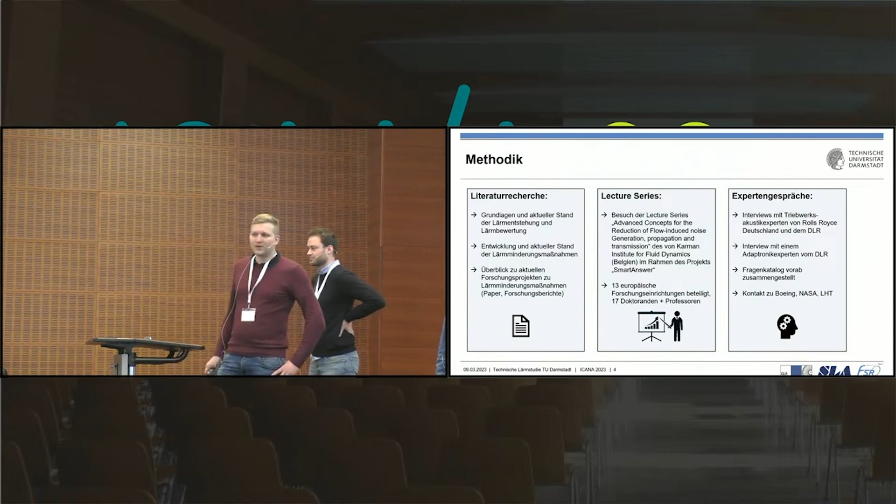The data, this is what we already mentioned, come from a broad literature research. We all come from the university. We know how to read a paper and how to analyze it. So this is where most of the data come from. And in order to assess all these comprehensive documents, we got in touch with industry, Rolls-Royce, Lufthansa Technik, Boeing, and we also got in touch with the universities and institutes who wrote these reports, like NASA or DLR.

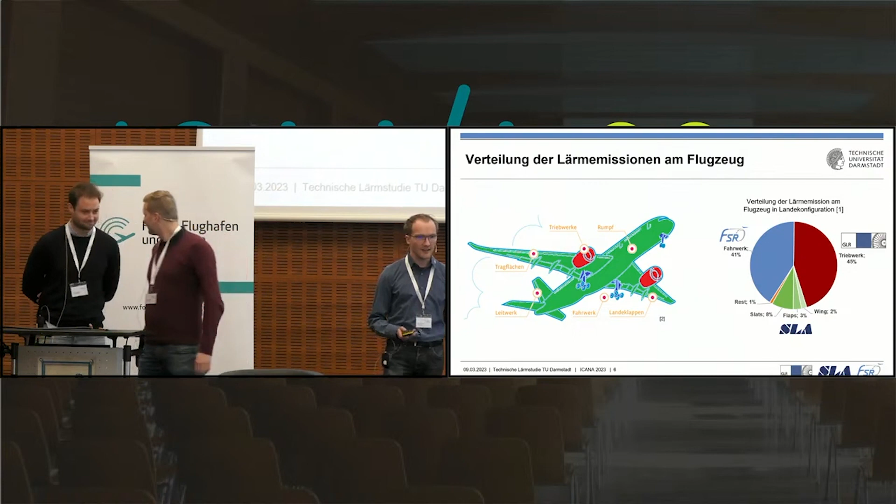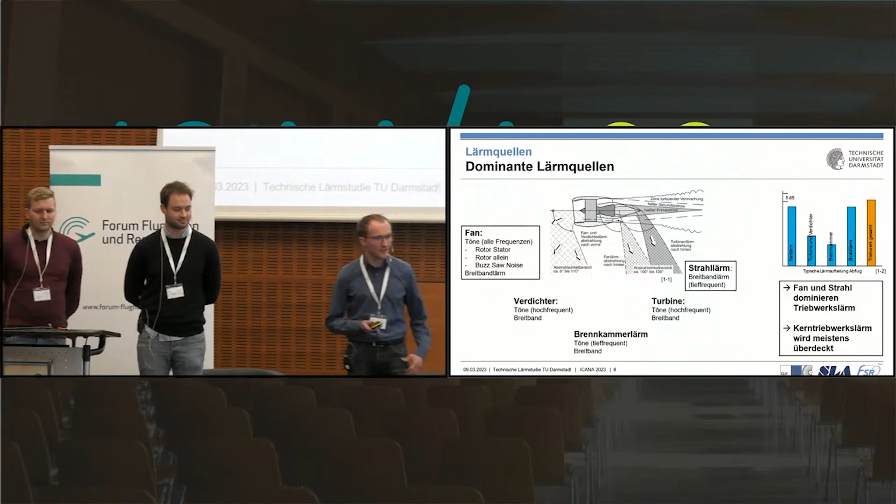Let me start with the engine. Before I come to the measures in noise abatement, I would like to talk about the noise sources. What is dominant here? You can see, for example, on that slide, a fan and a compressor. This is usual for each and every plane we know. And if you take a closer look, you will see the fan once again, then the compressor, which comes next. Then we have the chamber and then the turbine. And behind the turbine, you have then the jet.

Looking at the engine, you will see that noise is being caused everywhere. You have the rotors, you have the fan, the compressor. This is where you will get tonal noise, caused by the interaction coming from the cold secondary flow, the hot primary flow, and when it comes to the jet, you will get a broadband noise. This differentiation is very important because tonal noise is heard at a different frequency, and broadband noise has another frequency. If you take a look at the top right-hand corner on that slide, you can see where most of the noise comes from.

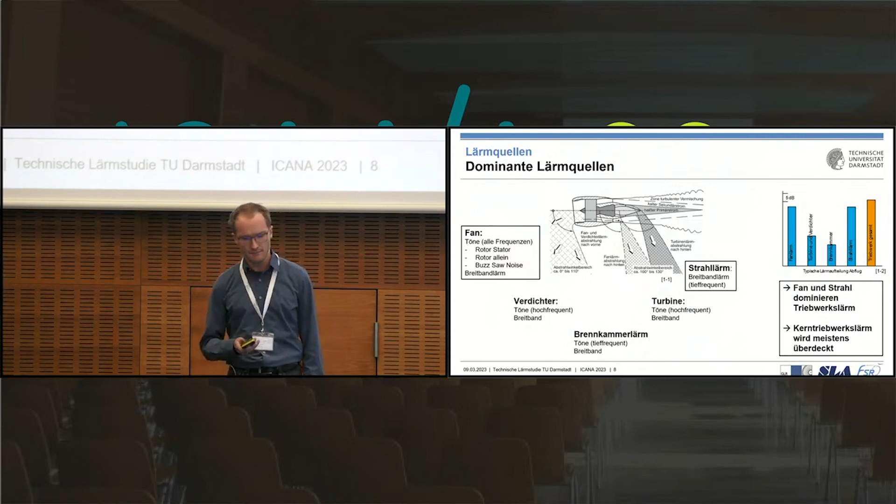You will see that the engine noise is dominated by the fan and the jet noise. The combustion noise, for example, and the turbine noise are a little bit lower than the fan and jet noise as such. So this is where you can see most of the effects if you do something against the fan or the jet noise.

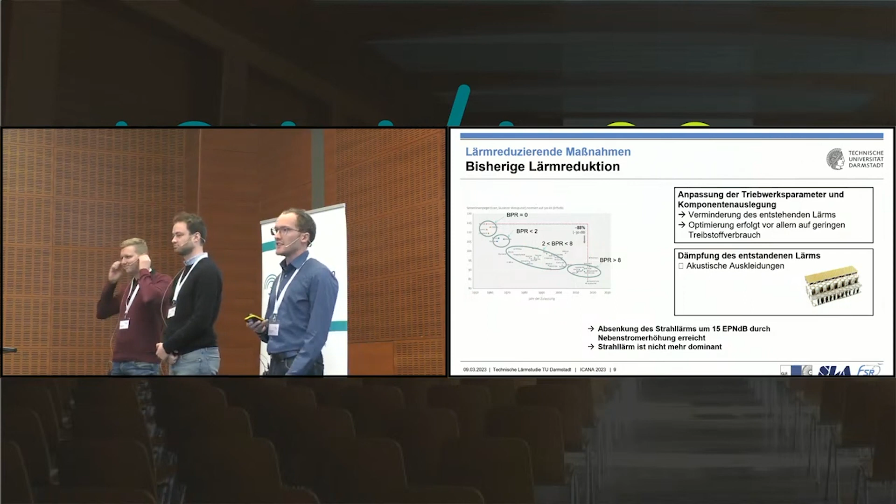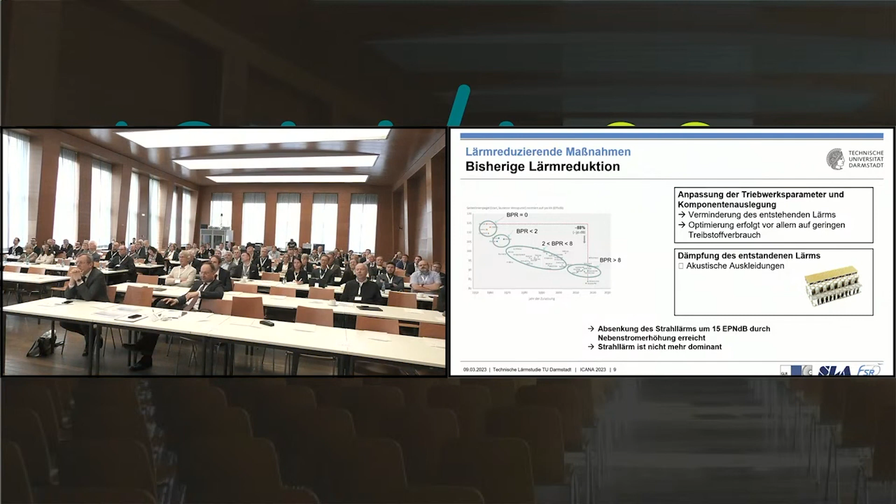What has been done so far, noise reduction to date, since we had, for example, jet engines in civil aviation? They started in the 1960s. The first jet engines were 30 decibels louder. So it is a lot of noise, and the noise was reduced between the former jet engines and the ones we're using today. There are two reasons, two blocks.

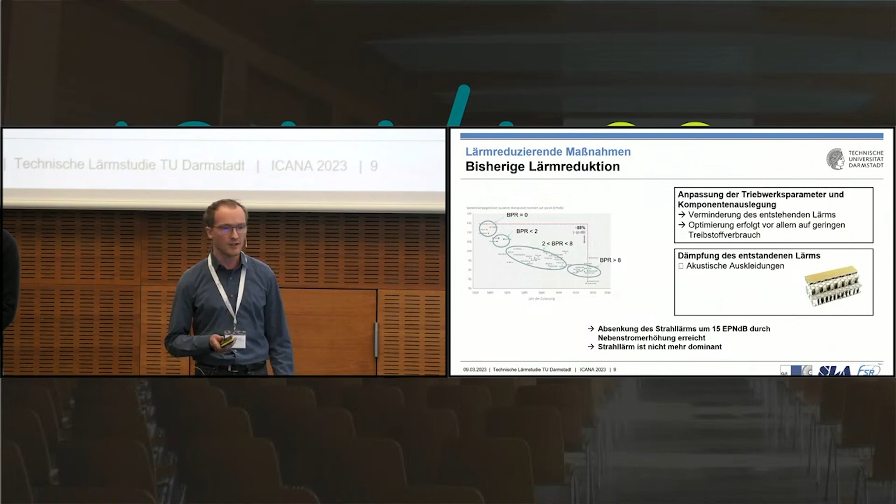Engines have been further developed since the 60s. We have a reduction of noise generated, and to be fair, this kind of further development was also made in order to lower fuel consumption. However, this also went hand in hand with the noise which was generated. If you use less fuel, you will have less noise produced. Then we can see that we have an attenuation of the generated noise by, for example, acoustic linings. This is how we're dampening the generated noise as well.

Let me carry on with a very important factor for reducing noise: increasing the bypass ratio. On the left-hand side, you can see a single jet engine, and it works like that. You have a little amount of air flowing into the jet engine, then it's being densened, it is being burned in the engine, and this kind of speed is being increased to a higher speed. Higher speed means more noise, and this is in the amount of the factor 8 — it is multiplied by 8. So if you increase the bypass ratio, then you will have less noise.

What was done, and this brings us to the picture on the bottom left, a different kind of bypass engine was used. You're not using the core engine, but most of the air is bypassing the engine. This is how you have much more airflow in order to have exactly the same thrust. You have lower speeds in the jet stream, and this is leading to a massive noise reduction.

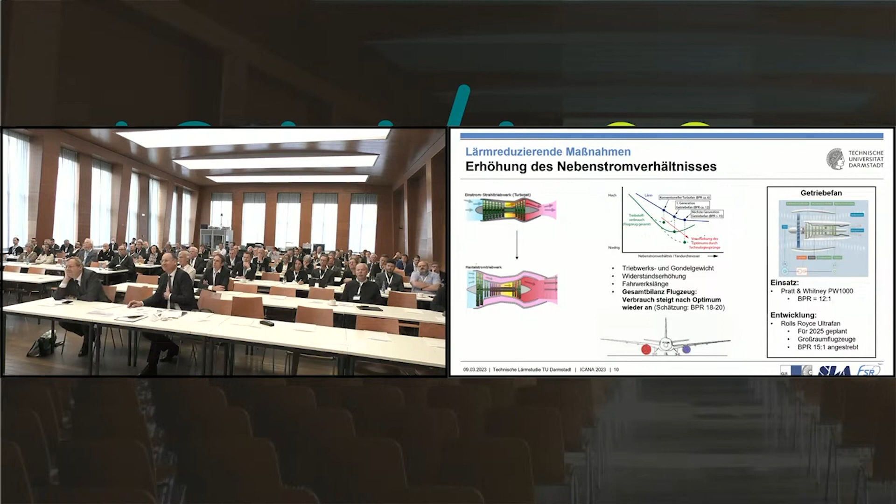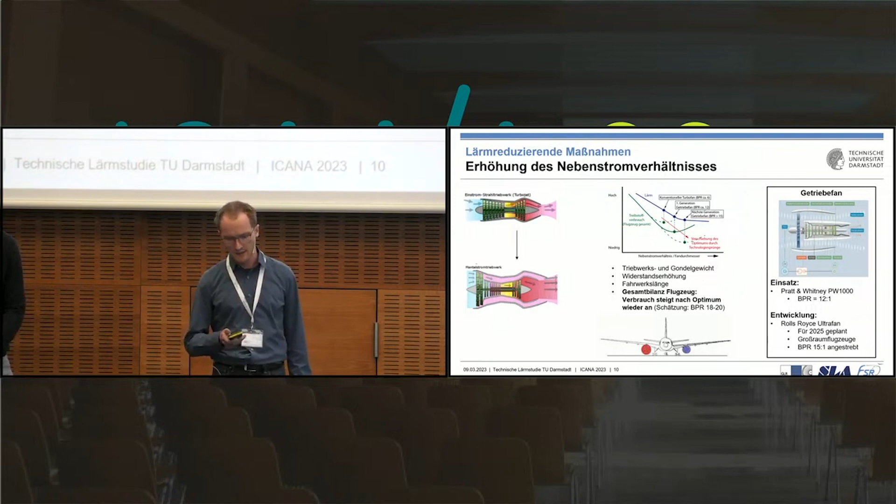However, the noise from the engine was reduced dramatically by that increase of the bypass ratio, so the fan noise and the engine noise are comparable now.

The jet noise is caused by a mix of a high-speed jet and the environment, the air. We have smaller and bigger turbulences. If we have smaller turbulences, it is a high-frequency noise, and if we have larger turbulences, it is a low-frequency noise. You might know it, like a bass at a concert is always very loud, and the higher frequencies are never as loud as the bass.

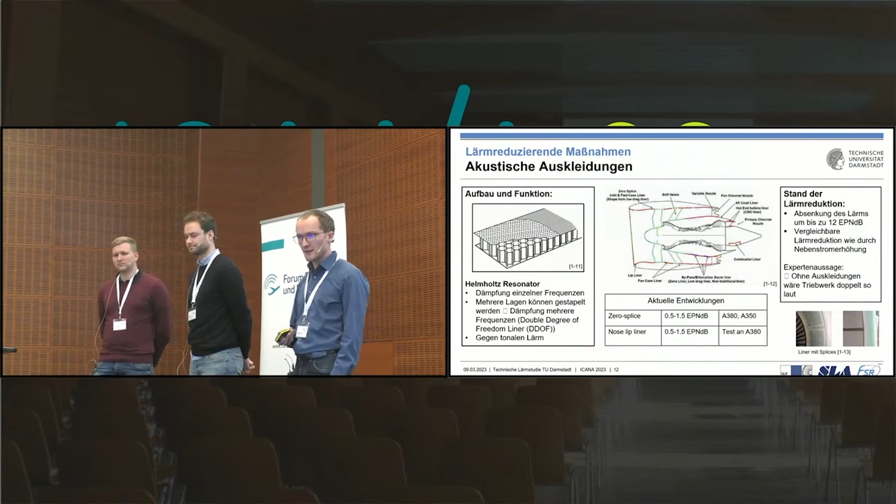You can see it in the center. Everything which is highlighted in red is being lined with these kinds of acoustic linings, so it is being used to dramatically reduce the tonal fan noise.

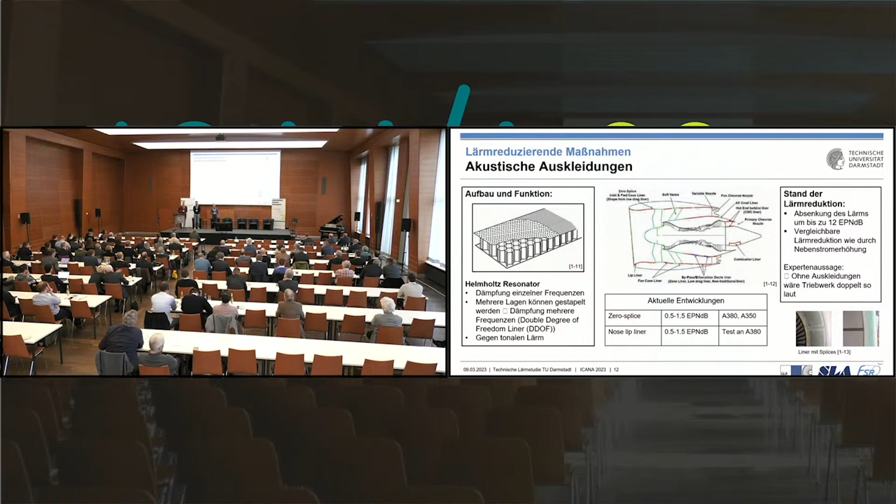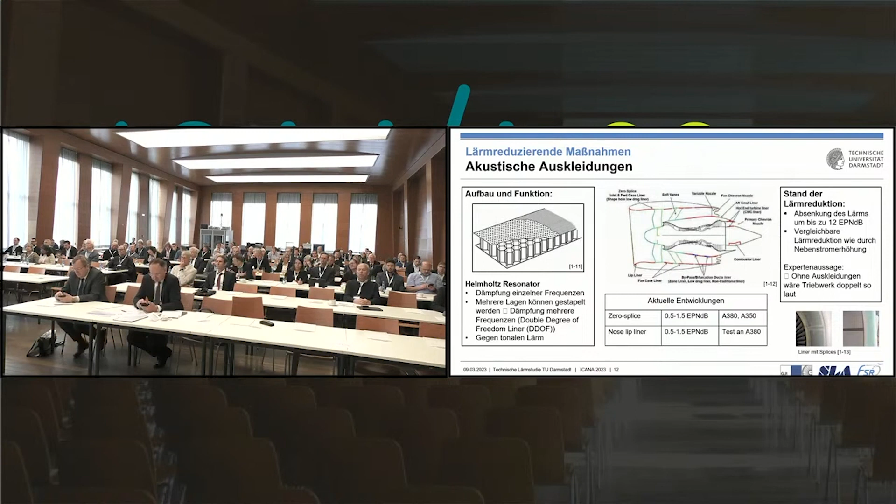And the state of the art in noise reduction is, for example, a reduction of noise by up to 12 EPNdB. Without the acoustic linings, the fans would be much, much louder, twice as loud to be precise.

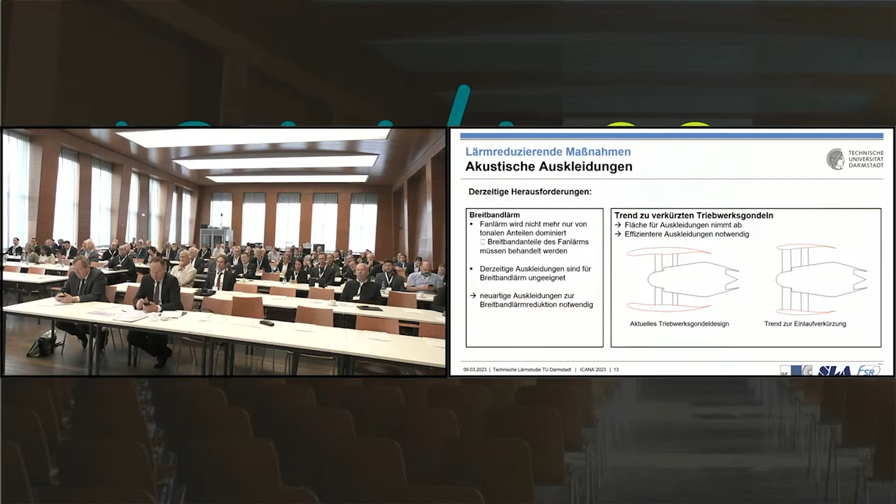However, these acoustic linings can only be used to mitigate tonal sound, nothing when it comes to broadband noise. In some situations, the acoustic linings helped very much against tonal noise, but the broadband noise which exists in fans is not being treated.

In order to make sure that further noise reduction can be reached, acoustic linings are needed to reduce broadband noise as well. You can see it on the right-hand side, as I mentioned at the beginning.

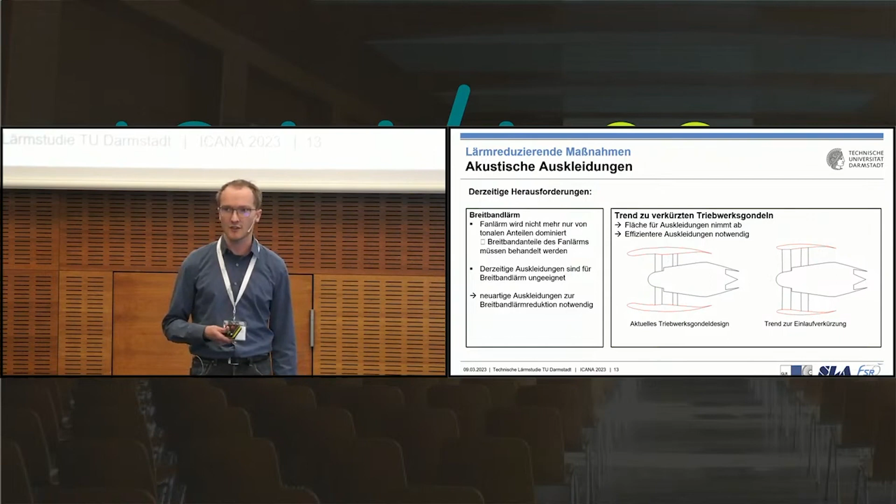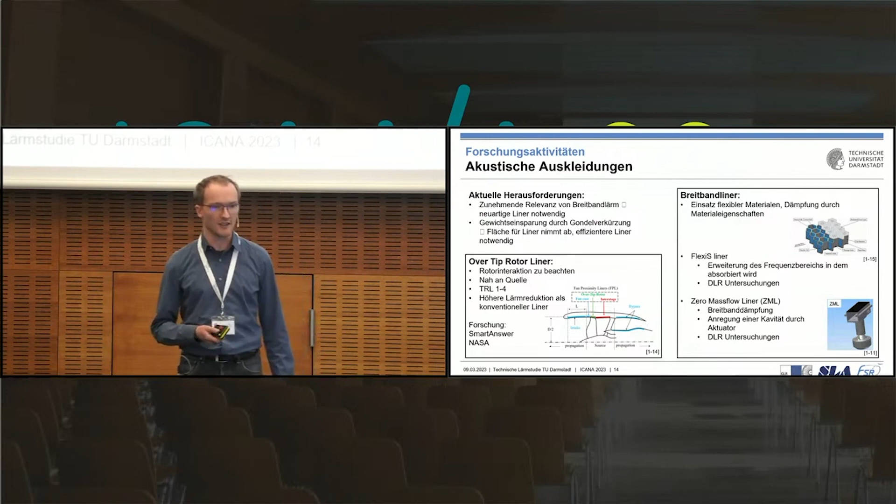So using linings there is something which still needs to be further examined, and research is being done in this area. On the right-hand side, you can see other options like the broadband liner, for example. Flexible materials are being used to dampen through material properties, flexible materials which can reduce the noise. Or actuators are being used, for example, to extend the frequency range. Further measures to reduce fan noise are active measures.

The principle is similar to what you might know from noise-cancelling headsets, which means you are reducing sound by countersound. If you think of noise-cancelling headsets, you're using, for example, error microphones and loudspeakers, creating some countersound.

But we have learned that there is not much benefit compared to acoustic lining, which means the noise reduction is not that dramatic. If we want to see a higher effect, DLR tries to use compressed air injection between rotor and stator. Other measures being analyzed and researched right now include treating the blade leading edges using wavy or jagged edges.

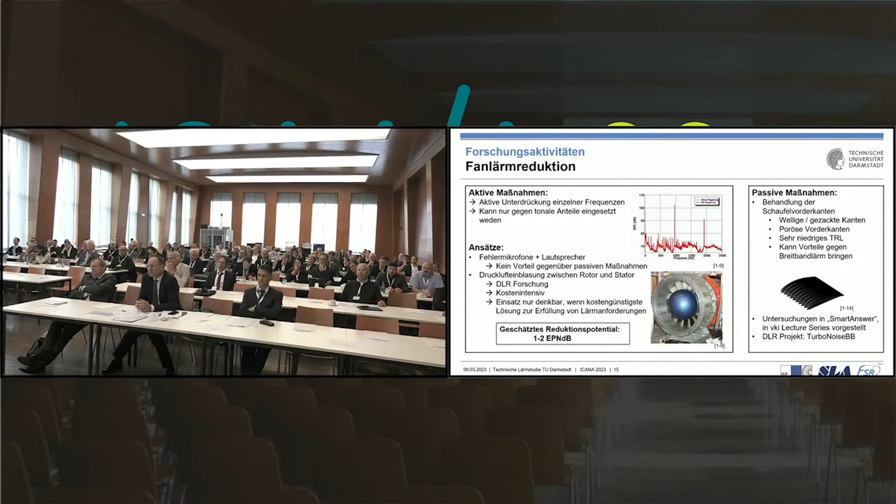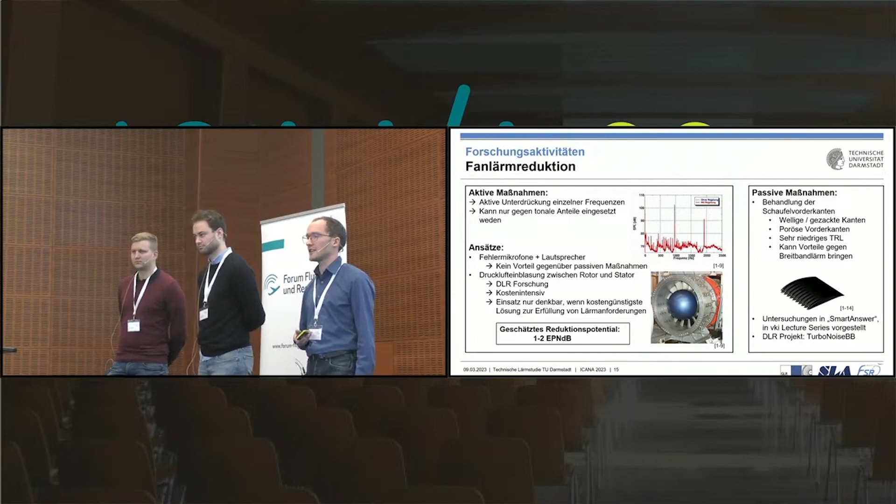But this is not very advanced at the moment, as there are other challenges to face regarding stiffness and aerodynamics. So it's a massive change to amend the blade leading edges to make them wavy or porous. It will still be in the focus of research, and it will take some time until we can see finished products offered to the market.

This brings me to the end of my part on engine noise. I tried to present some noise cancelling or noise reduction possibilities: adjusting engine parameters, increasing the bypass ratio, acoustic lining to dampen the sound. And there is a lot of research being done on active countersound measures.

Finally, I would like to make a brief forecast of further engine noise measures. We expect only small improvements in the near future. How come? Well, we've already reached a lot by reducing jet noise, and now people know that jet noise and fan noise are comparable.

Okay, I will continue with the landing gear. As mentioned at the beginning, especially in the approach, the landing gear has a very dominant significance, just as the engine. Before I talk about the measures, I would like to start with an interesting fact.

If you go down a bit, the lower picture is by NASA. With overflight measurements, they have found that the nose landing gear under the cockpit, although it's much smaller and slender, produces more noise than the larger main landing gear.

And there's a proportional correlation: noise is proportional to the flow speed with a potency V to a factor of 6 to 8, depending on the source. So you can reduce noise by reducing flow speed. That's a fact we need to consider again and again.

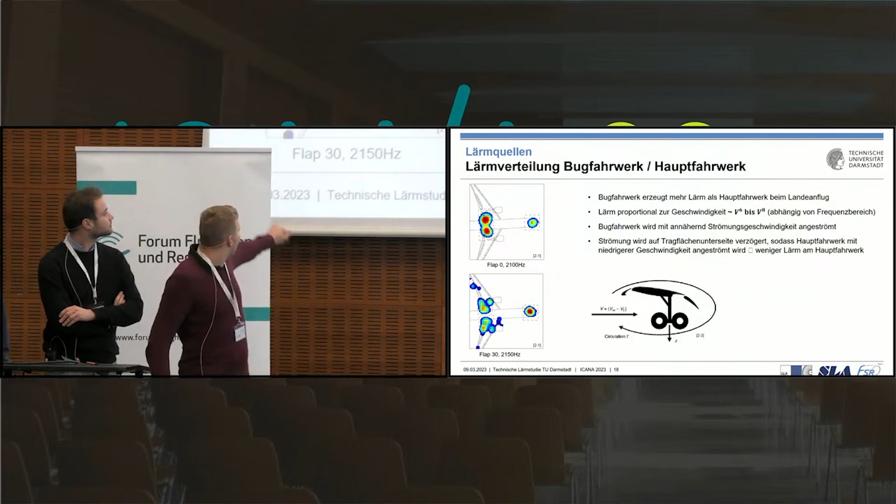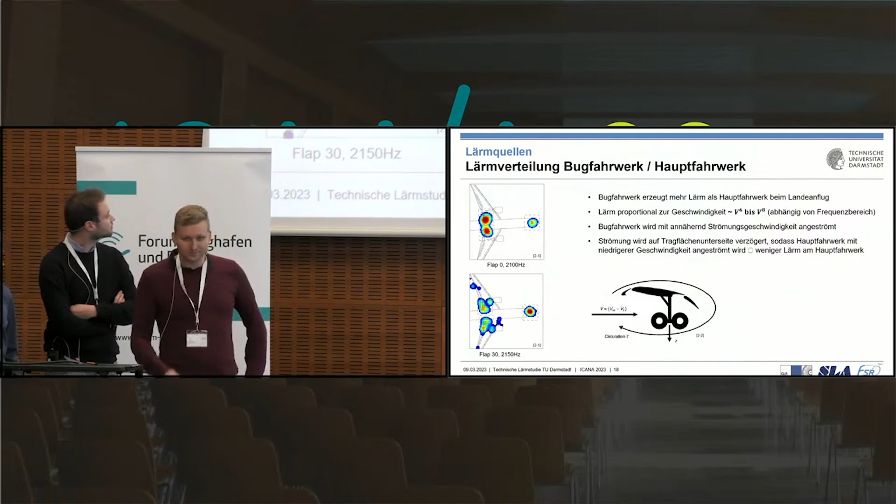With the main landing gear under the wings, the wings create uplift, and the flow at the lower side is slowed down, and this slowing down is enough so that the main landing gear is not the dominant source of noise. So you see how it looks like.

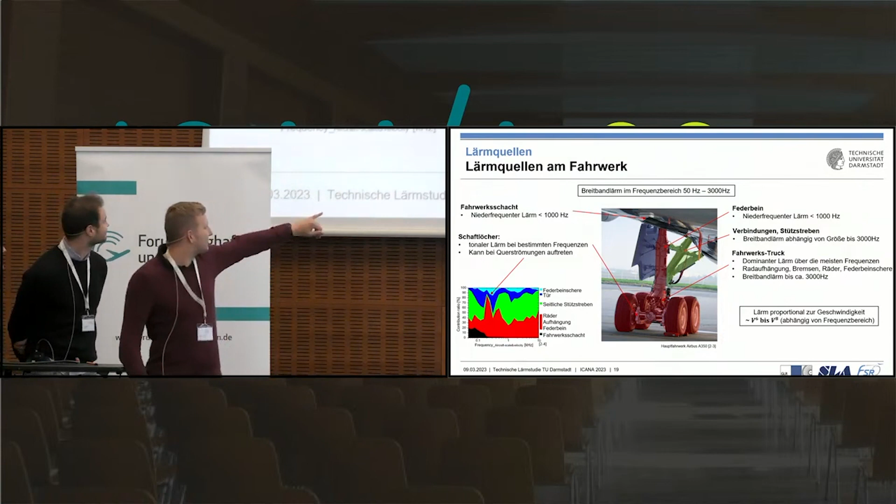I brought one with me. It's relatively complex — some larger ones like the strut, the braking system, the tires, the wheels. I think you see it quite nicely: a lot of small cables, hydraulic lines for the brakes.

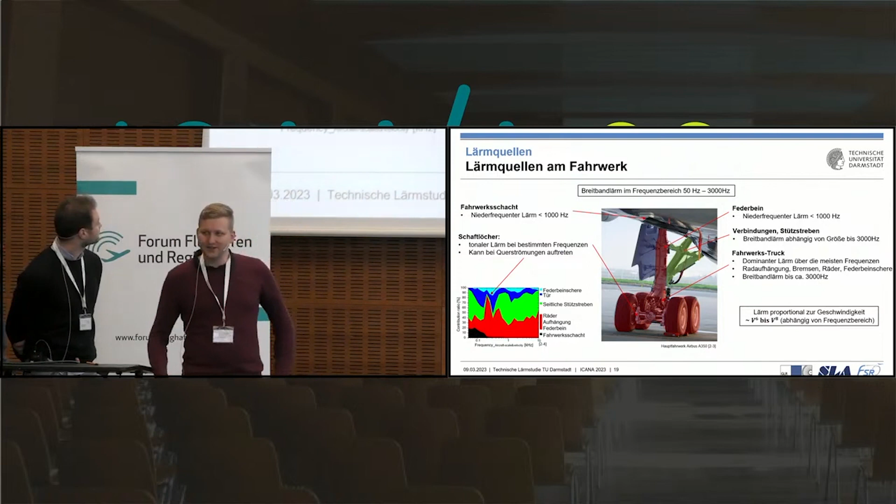And all together that leads to a broadband noise of 50 to 3000 hertz. That's more or less when the human ear is most sensitive. But I'll come back to that.

Now, how is noise generated? We have a flow situation from the left. It flows around a component, and behind that there is a turbulence wake, and this is what we perceive as noise — pressure fluctuation. In general, large components produce big turbulences and low frequencies, smaller ones produce smaller vortexes and higher frequencies, and this is how we have the different frequencies.

And what we also have — maybe in the upper area you don't see it that well — that's the shaft. That produces its own characteristics of noise.

And what possibilities do we have, especially with the components you see here? With the landing gear, you can only optimize them by lining them, by cladding them. You have fixed and porous claddings or linings, and with the fixed claddings, the objective is to shield critical components — the flow goes around, is deflected around.

There's a big disadvantage: if you deflect flow, you accelerate it — always. And as I said, noise is proportional to speed. When the deflection hits another component with a higher speed, it might happen that a cladding generates noise at a different place, and partially even louder.

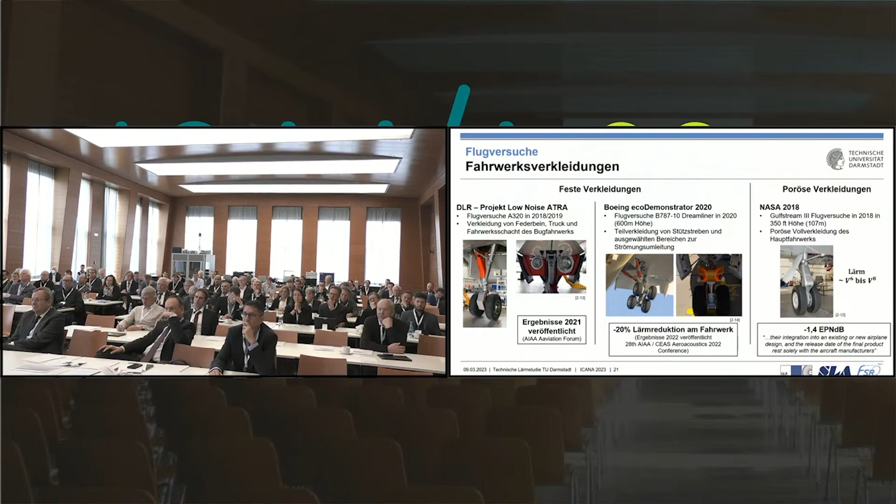On the right-hand side, that's a NASA experiment from 2018, and that was minus 1.4 EPNdB. You have to put that in relative terms - it was a research project, so the landing gear could not be retracted. If you design it for real aircraft traffic, you have to change it. But definitely you can reduce more noise than with the fixed claddings.

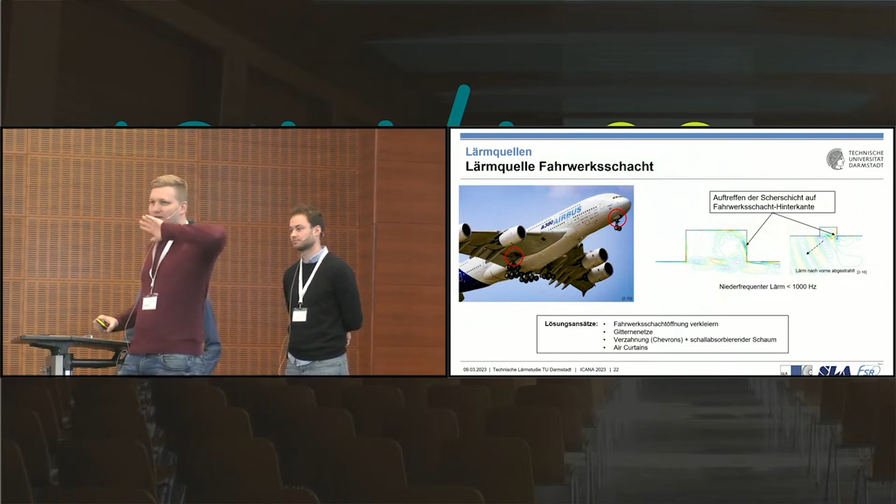The second part of the landing gear producing noise is the landing gear shaft. You see it here, less than 1000 hertz - those are the lower frequencies that you can perceive over long distances. The flow comes from the left and penetrates the shaft. The shaft acts like a resonance body, like a bass box, and radiates to the front, so that's noise you perceive already before the aircraft has passed by.

For that there are different approaches. The most logical is the video you see here: the real shaft during start and landing is not fully opened, but there's a flap mechanism, so while starting and landing a big part of this surface is covered. There are aerodynamic reasons for that, but there are also positive effects when it comes to noise. Disadvantage: mechanically, there's always a little gap open.

This is a simple retrofitting measure with 0.5 EPNdB noise reduction potential. Just to remember, the claddings on the left-hand side were also 0.5 EPNdB, and they were much more difficult to design. Maybe that's a measure you can really do and consider as retrofitting.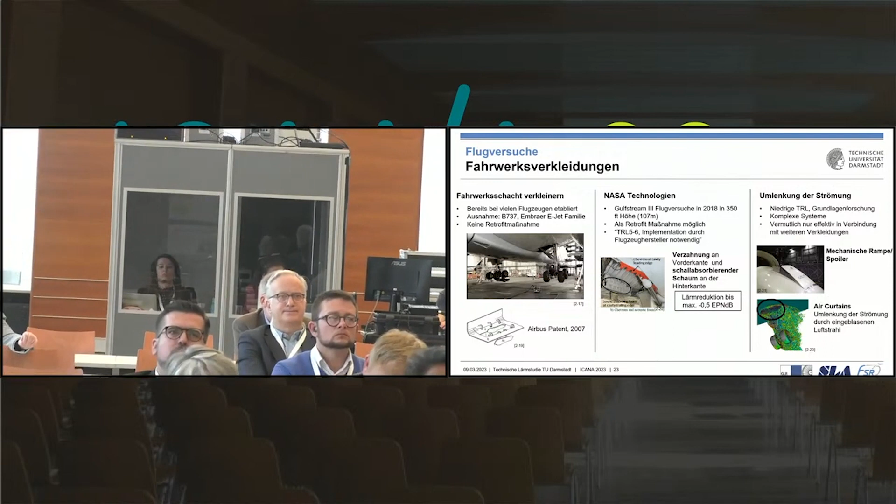On the right-hand side, you can see a look into the future. There are possibilities or theories that the flow could be deflected around the shaft with a mechanical spoiler like in the top picture, or, that's interesting, with a 90 degree turned airflow that deflects the flow. These are technologies that haven't matured a lot, so they need to be researched more, and in the next 20 years maybe they won't be available.

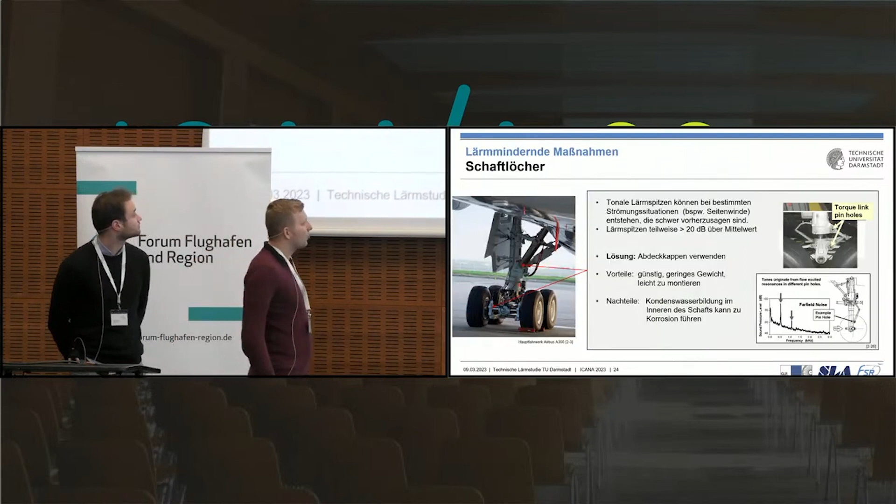So the video once again. There's another problem with landing gears, and I think DLR has known that for 20, 30 years - they've always considered that. These are the so-called shaft holes. Everywhere at the landing gear there are little cavities, and especially with lateral winds, if there's lateral flow, there might be tonal frequency peaks.

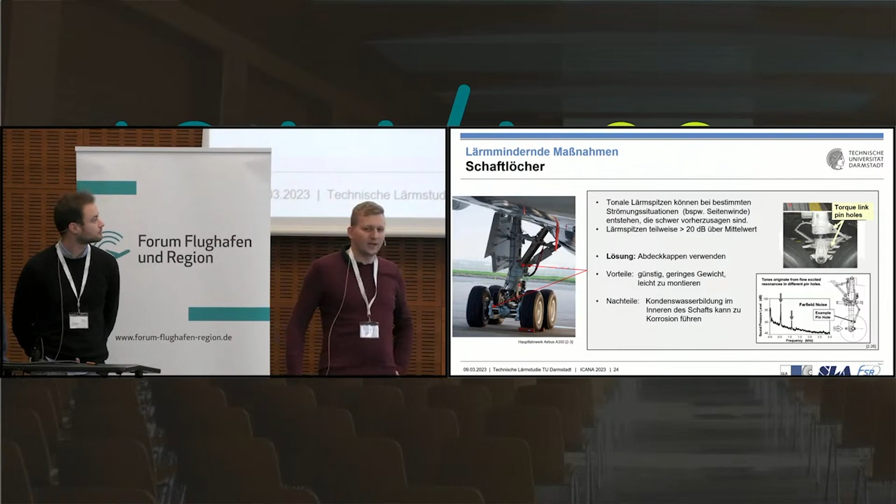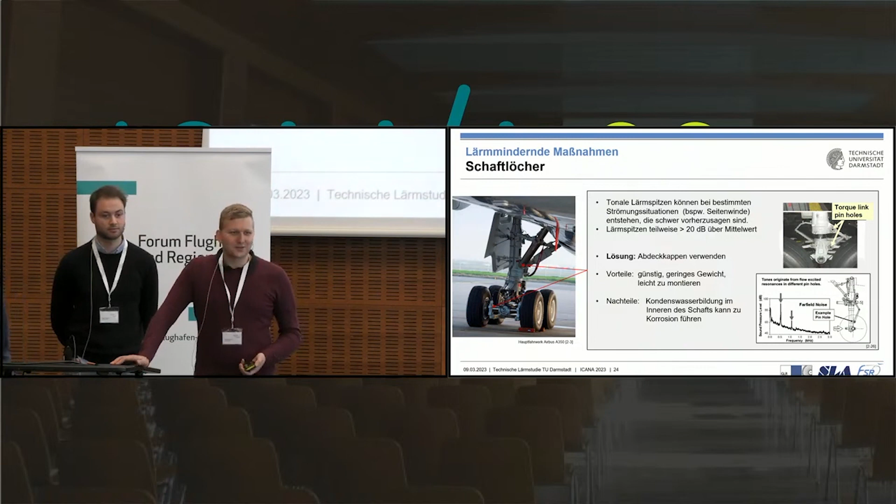Maybe you can see that here - these are the whistling sounds that you hear. You can eliminate them easily by just having a plastic cap on it, or one made of a different material. We talked to experts and they said it's a great solution, can be easily done. But other experts said it's a very bad idea - condensation water might accumulate during starting and landing, which might lead to corrosion, and you don't really want the landing gear breaking off during start or landing.

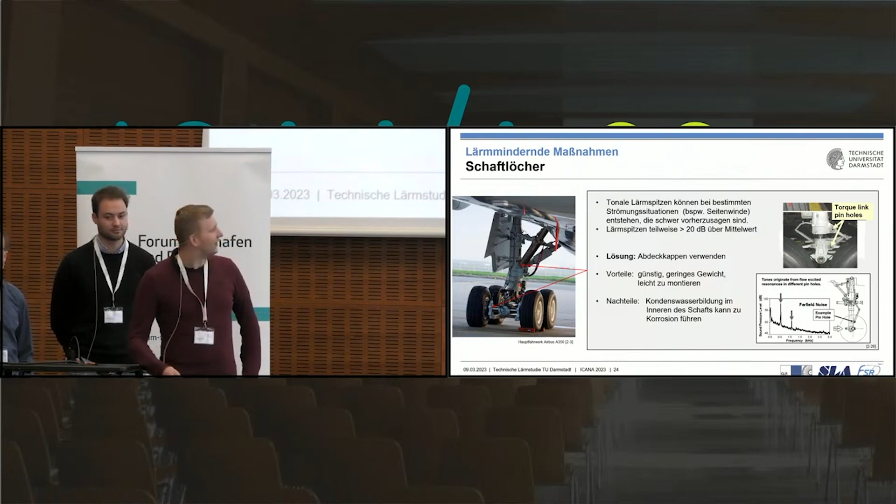So a very difficult discussion, especially with engine manufacturers. You could mention that as a design hint, so that shaft holes, maybe when designing the aircraft, should be considering that point. That was it already when it comes to the engine and the landing gear.

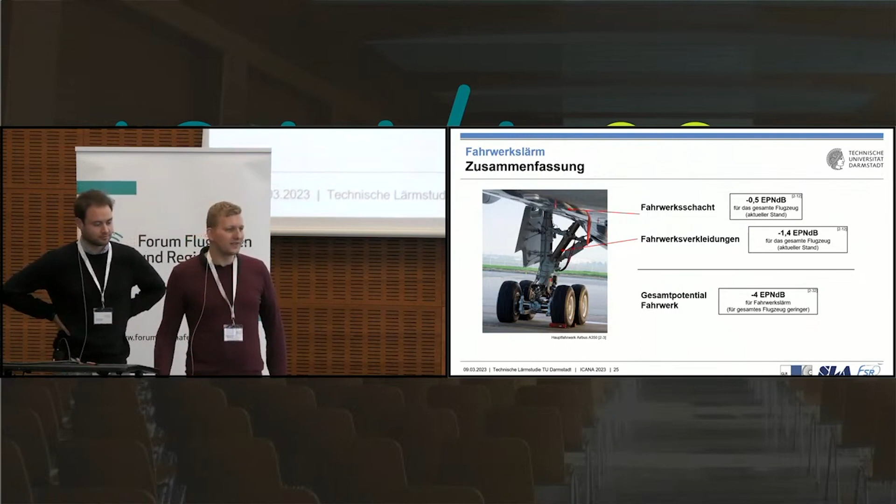Noise reduction of 1.4 EPN dB with claddings could be achieved, and 0.5 with the shaft optimization, and that's a total potential according to DLR for the landing gear. 4 EPN dB noise reduction is possible, only related to the landing gear. You have to calculate that together with the other components. The final value will be available at the end of that study, so we have to do some more work.

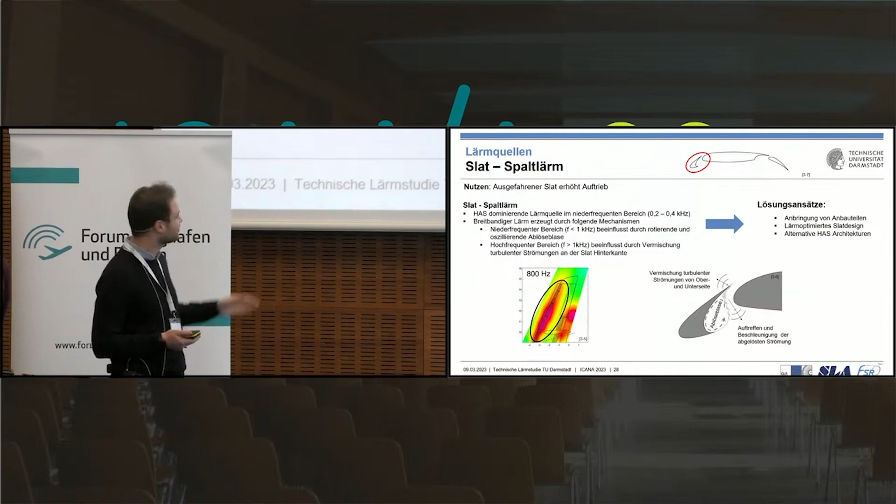Let me start with the slat slit noise. You can see it's dominating the low frequency range, and if you take a look at the left-hand side, you can see the heat map, and you can see where the noise is being generated. At the front side of the wing, here we have 800 Hertz, and the mechanisms which come into play here and which will lead to noise can be found on the right-hand side.

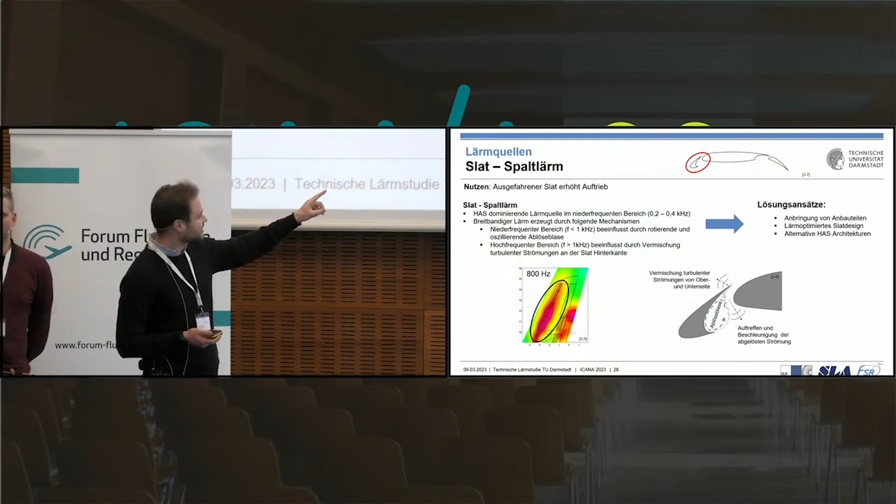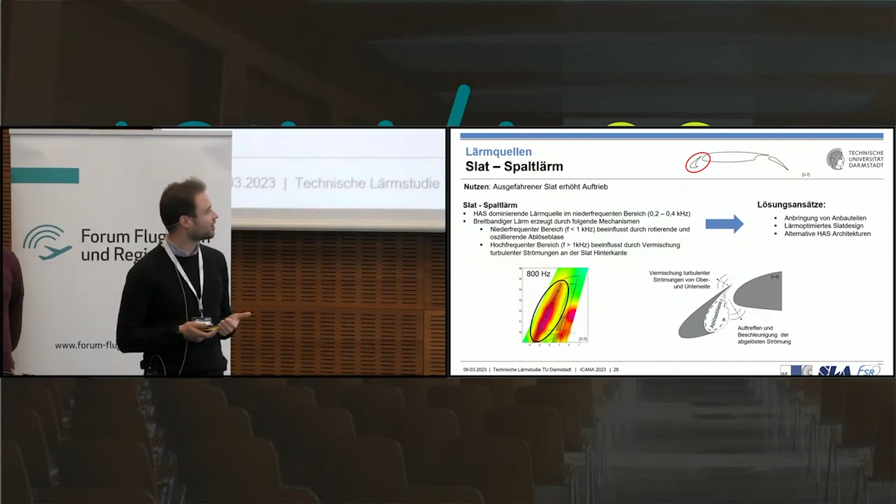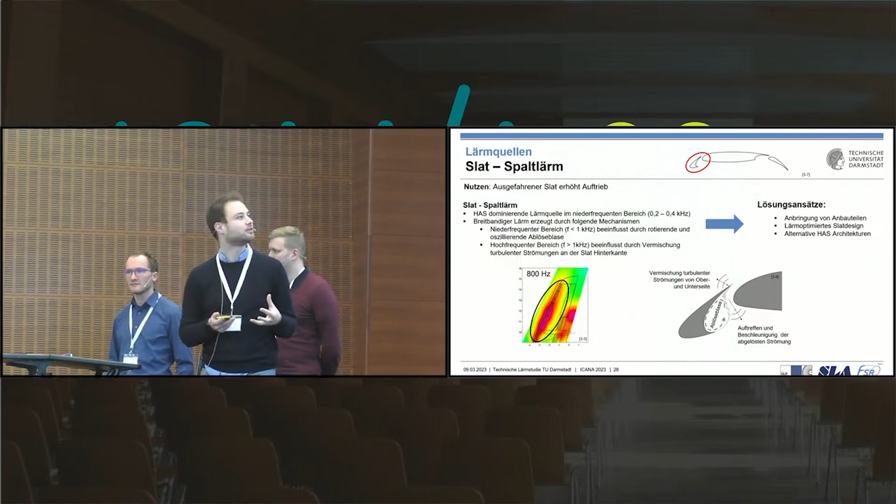At the end of this slat, you have this detachment bubble, which is oscillating. Secondly, you have at the upper edge the mixing of two airflows, and they're being deflected. If you want to reduce that, these two phenomena need to be influenced, and this can be done with the support of three concepts. You are adding, for example, attachment parts, as my colleagues have already presented. Then you have to optimize the slat design, and you have to find an alternative HAS architecture.

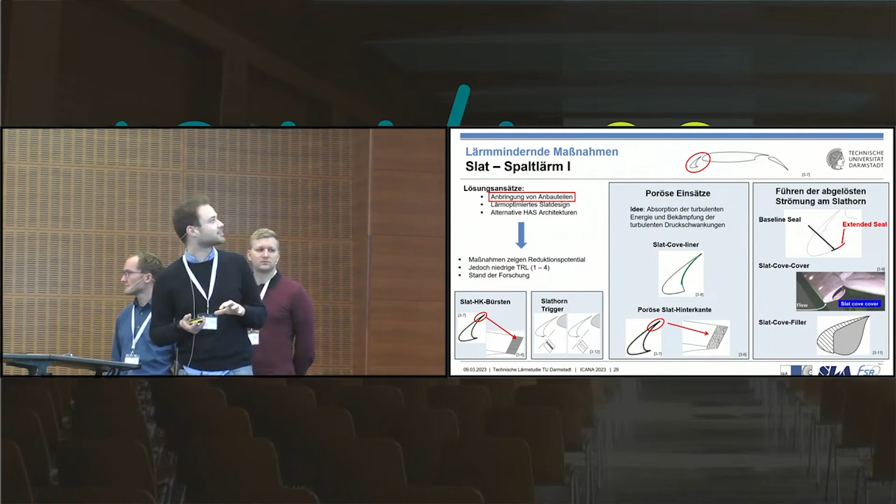So let's talk about the possible attachments. They have some reduction potential, however that potential is not very high, and the technologies are not very mature. Starting on the left, for example, you can add some brushes at the edge of the slats to increase the mix of the airflow, or you're adding some slat horn triggers which are then changing, for example, the oscillating blister. However, it might also lead to higher noise. It's very ambivalent, and it is still being researched.

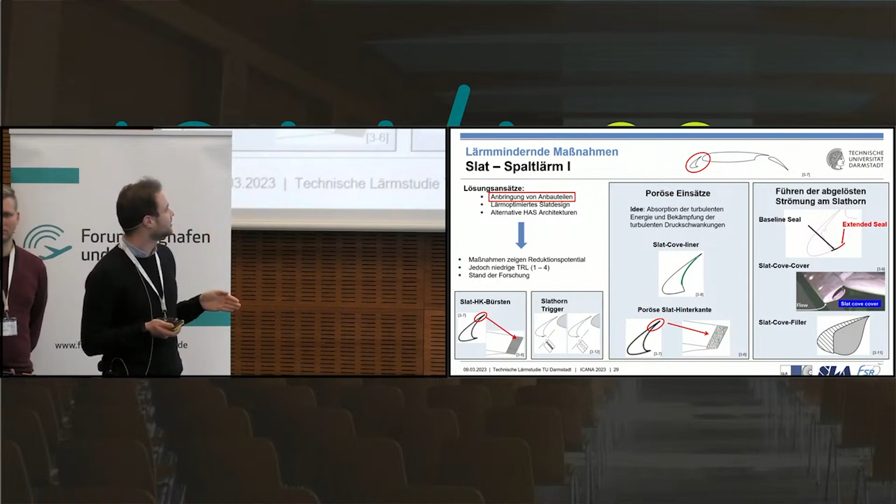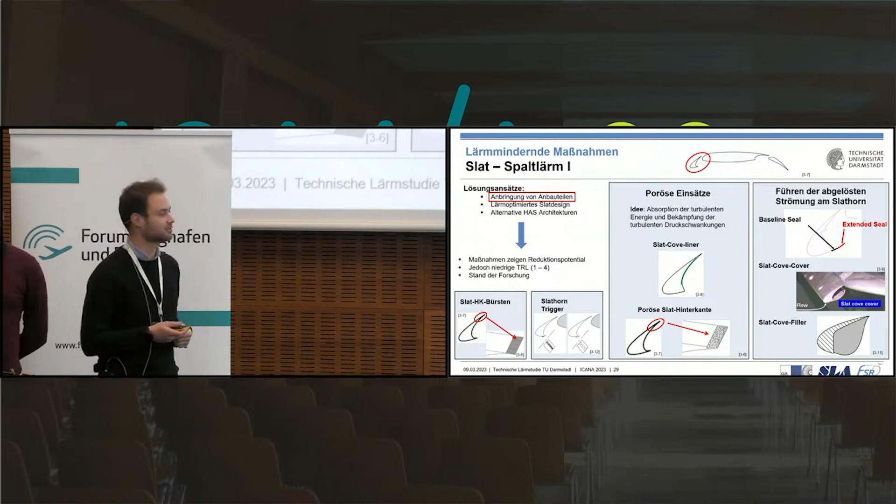Then porous inserts are also possible. Their impact on noise is comparable to the landing gears. So we can have, for example, a slat cove liner, which means adding some cladding or liners to the slats, or you are changing the geometry. Making the lower edge, for example, longer is also something you can do to reduce noise, as the effect of the oscillating blister is being reduced.

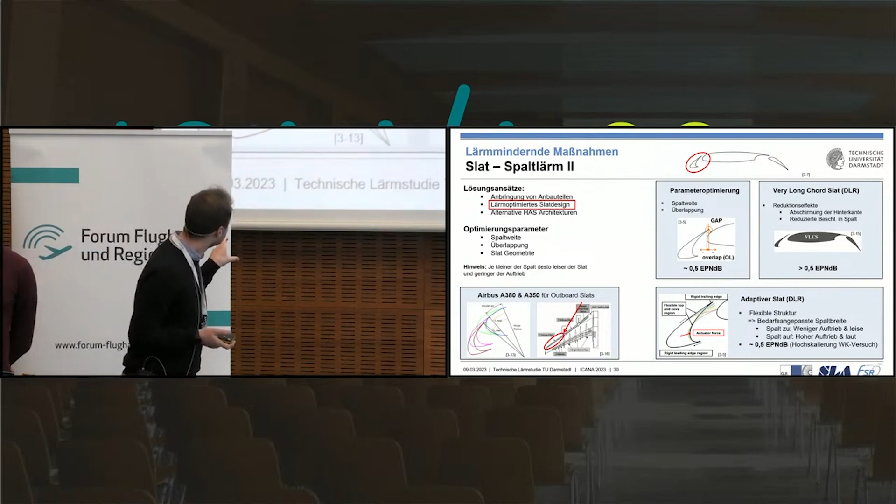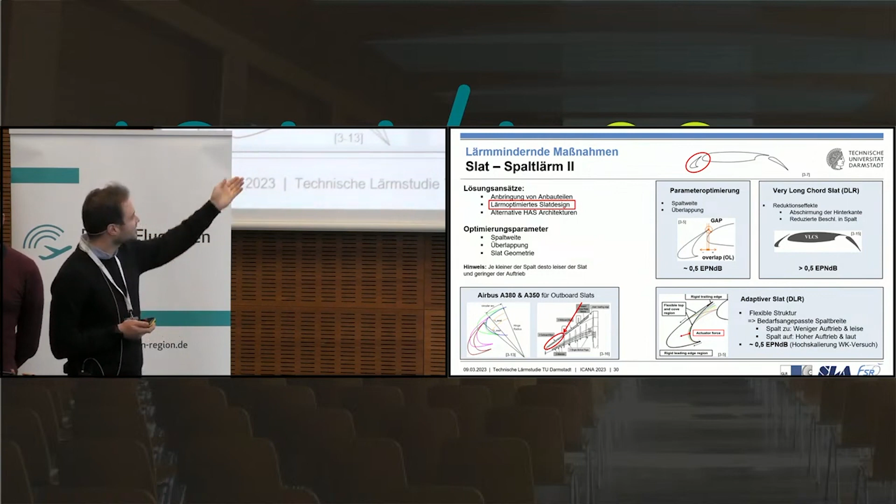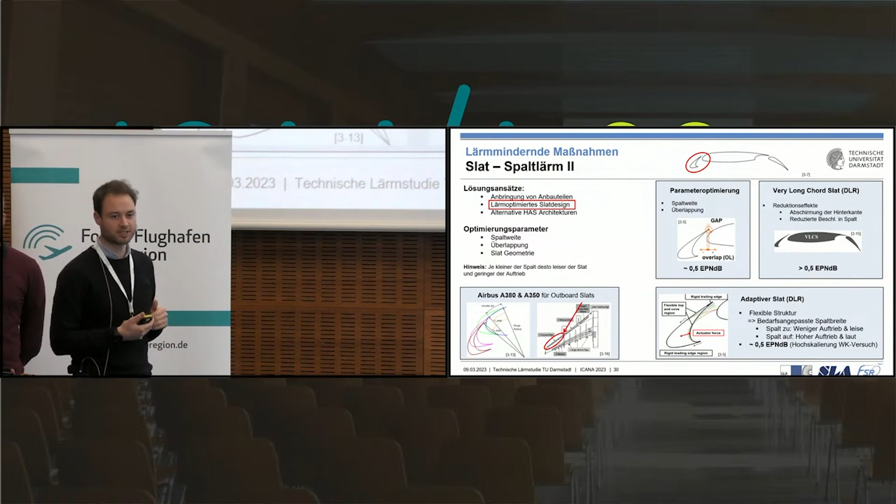Then we come to the next and more drastic approach. It's the optimized slat design, which means you change the slat design. It already works quite well if we take the Airbus A380 and A350. They have a new slat design where the slit is only very narrow, and this is why less noise is being produced. And if you optimize that, if you optimize the parameters, you can, for example, play with the gap width or the overlap which exists at the edge. And here we're talking about an effect of 0.5 EPNdB.

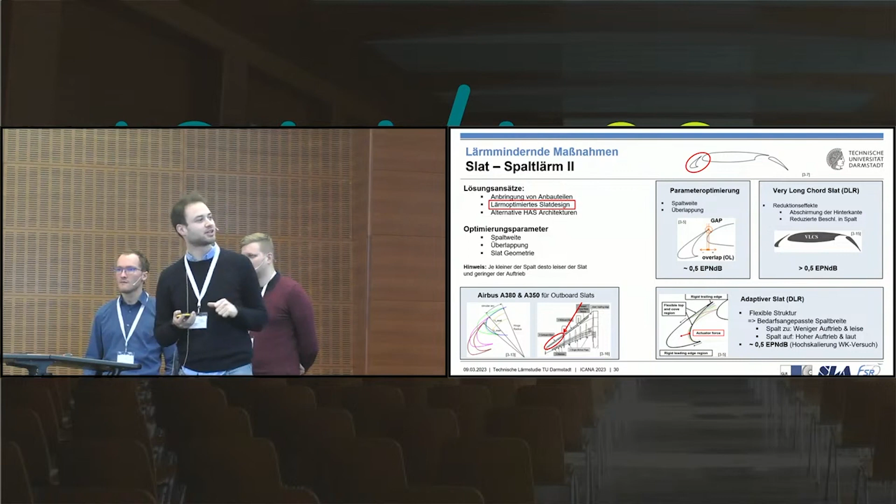You can also choose a very long slat, which means it goes beyond the edges. Or you can also have an adaptive slat. This is what DLR has analyzed. Then you will have a flexible structure, and you need to adapt the gap width, and this has an impact of 0.5 EPNdB.

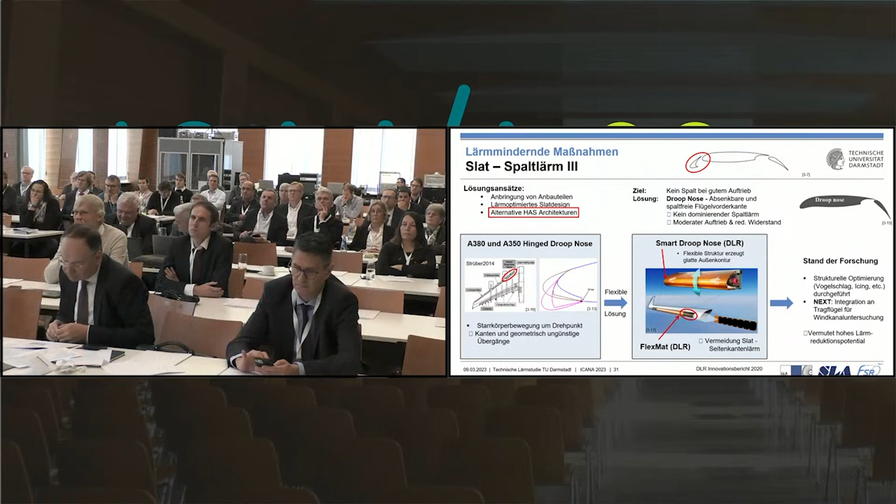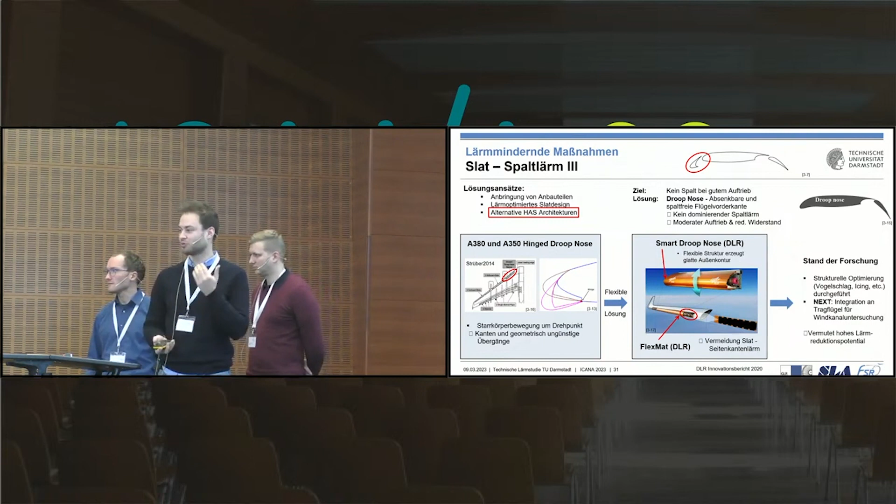You can also choose alternative high-lift architectures already used in the A380 and A350, which means you have a hinged droop nose. This is an alternative to the attachment or the noise-optimized slat, where we have a rigid body movement around the pivot point, impacting the edges and the geometry.

This kind of droop nose has a flexible front edge. The front edge is lowered and offers us further potential.

This brings me to the next big area: the side edge noise in the back at the flaps. At the side edges, we can see some vortices, and they cause noise. You can see it here with 800 hertz in the center of that slide, and very locally this noise is being generated. It's broadband noise again.

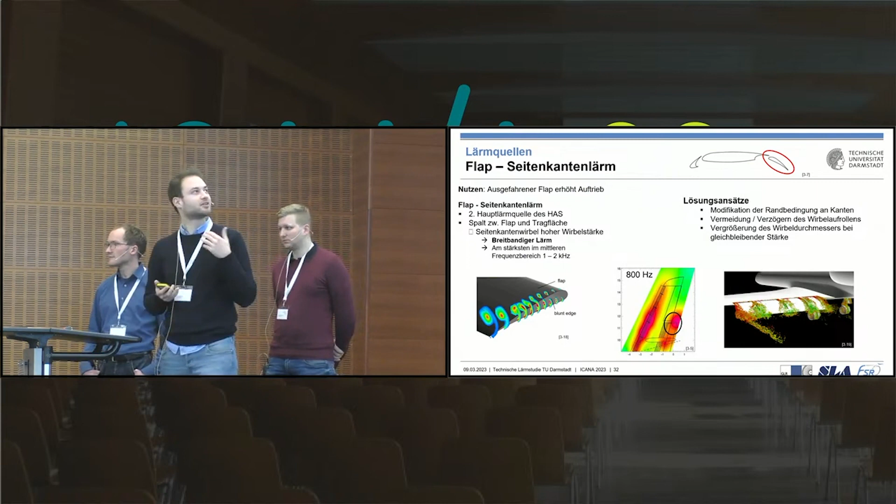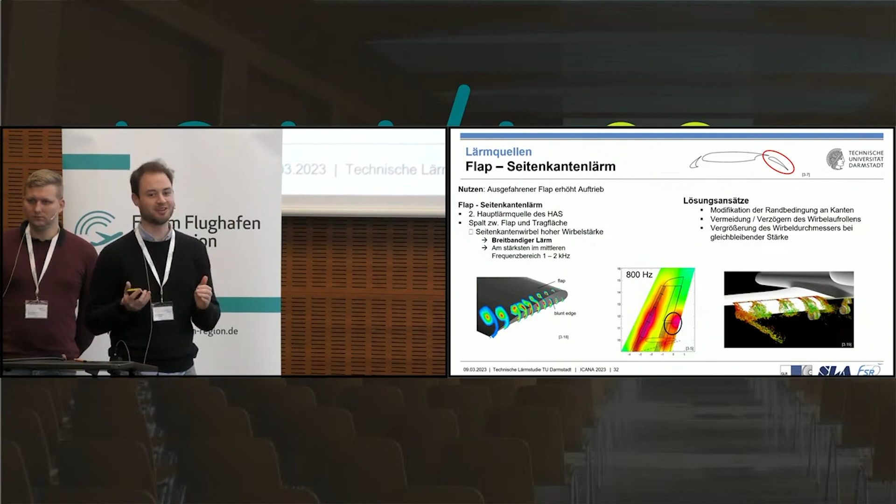If you want to reduce this kind of noise, you have to change the geometry of these side edges. That's the way you can change or have an impact on the vortex. The vortex can be increased, and that's the way you have a different impact - changing from higher frequencies to lower frequencies. So it's quite simple.

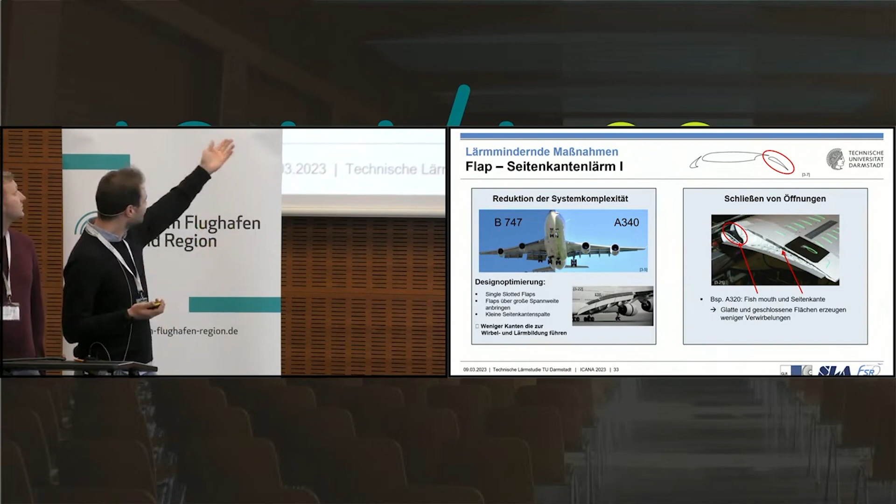Noise reduction is, for example, also possible by design optimization. Think of the 747 and the A340 - if you compare them, you can see less flaps. The flaps are broader, wider, less edges, less complexity, which means less noise at the same time.

Here, the side edge noise is already reduced, and then there are some openings which still exist at the side edges. They can be closed, they can be lined, which leads to a further noise reduction.

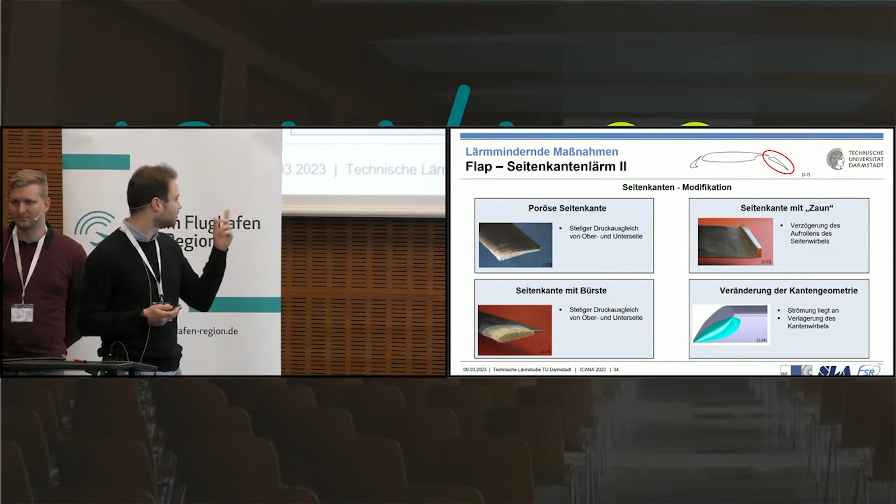Further modifications are also possible. For example, porous side edges, brushes, fences can be used, or you are changing the edge geometry to have a more rounded shape of an edge.

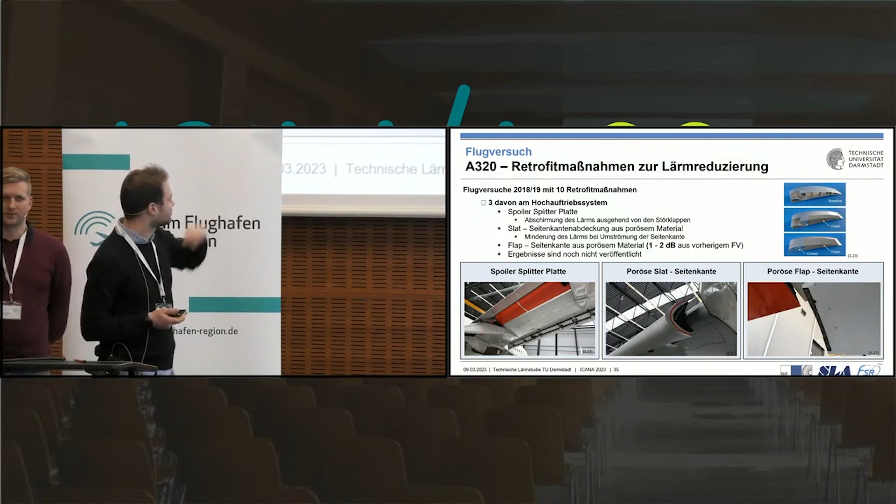So this is all being analyzed at the moment. DLR conducted an A320 low noise study, and a slit was closed, porous edges were introduced, and 1 to 2 decibel of noise reduction were reached by these measures. Then there's another point I would like to mention.

Tests were conducted by NASA, and there's also a second project conducted by DLR, not as mature as the NASA test, but it's exactly the same, having the flap side edge vortex suppression, flaps with flexible transition.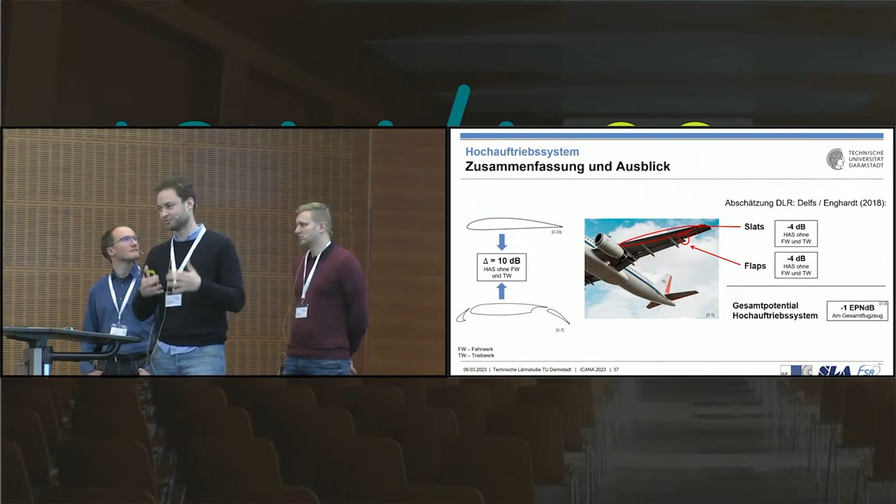So, my summary and outlook here on the high lift system: you can see that slats and flaps are crucial here. Speed is crucial, and if you want to have an impact on that high lift system, you have to make sure that you take speed into account, because more speed means more noise.

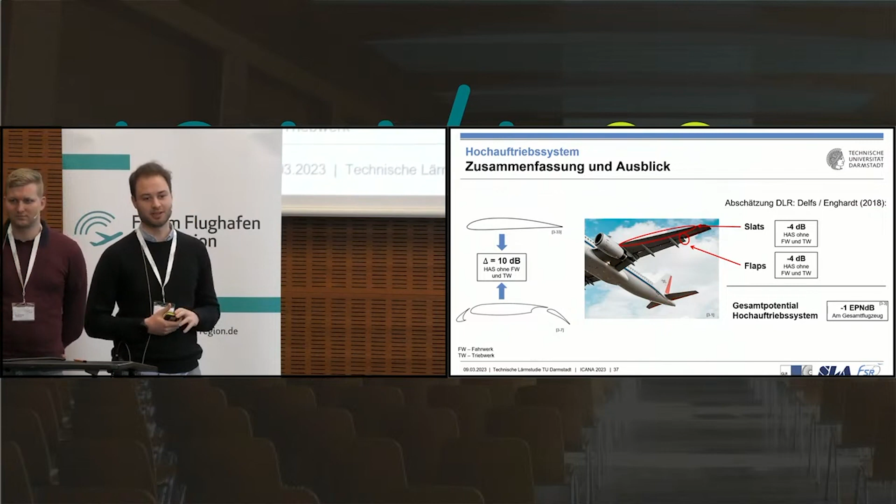4 dB can be saved if you change the slats and the flaps, but if you take the total potential of the high lift system, you will only have 1 EPNdB of lower noise impact, so it is not the biggest impact we estimate.

And this brings me back to Pascal. I would like to hand over to you. This is the last slide, promised.

So we presented some measures to you, and as a summary we can say in the past noise was reduced mainly by changing the engine - it was jet noise reduction. Now, however, other systems are also taken into account: the engine, the landing gear, the high lift system, and things like that.

We tried to give you an overview in 3 timelines. So we're talking about the last 10 years, where noise reduction was achieved by the renewal of the aircraft fleet, which means old planes are being replaced by new ones. Think of the A320, which is being replaced by the A320neo, and this leads to a noise reduction of 5 EPNdB.

This means if you have 10 dB less, then it is half as loud. And 5 EPNdB means a noise reduction of 30%. So it's quite a lot.

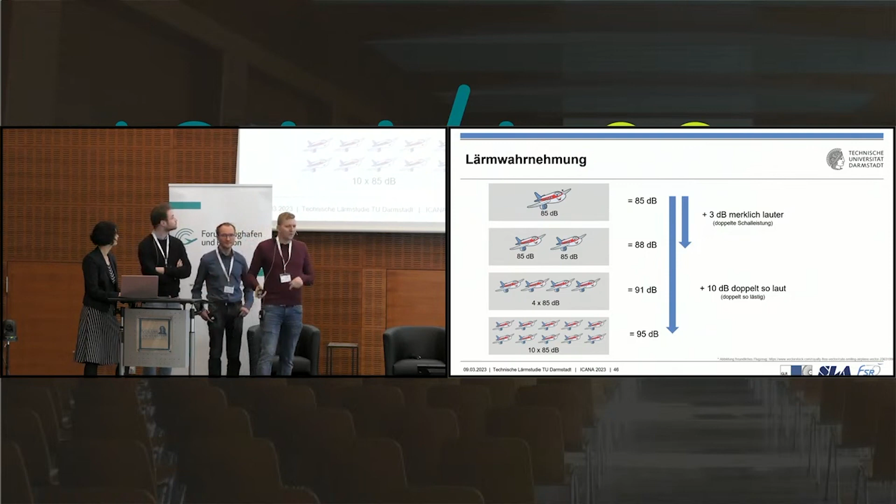Now if we increase it by 10 dB, instead of one plane, ten planes, that would be ten times the sound output, but you would perceive it as double the noise. So that's the 50% noise reduction corresponding to 10 dB. When it says dBA, it's always related to the amplitude. Just dB is the noise output. There's a little square in the formula, you can move it to the front and then calculate it.

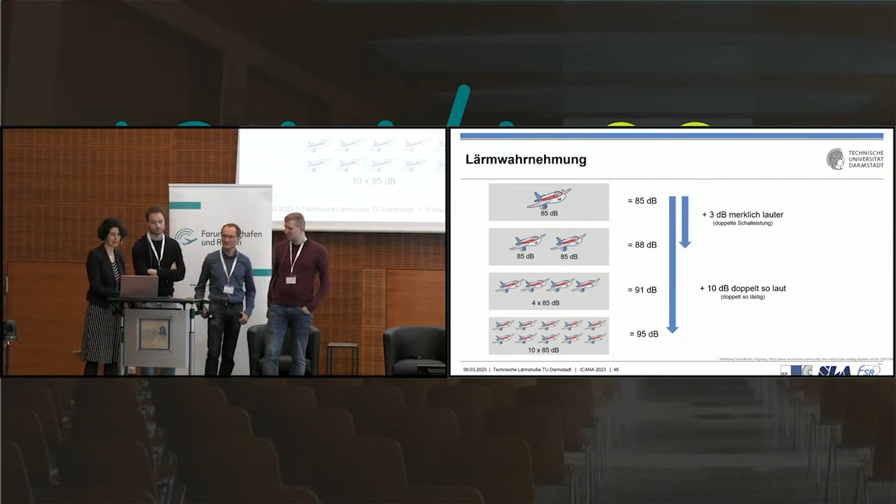Thank you for the explanation. For laypersons it's not so easy to understand everything. We asked about the difference between dBA and PNdB, which you mentioned on your first slide. dBA is the measured value of the amplitude. Maybe you can go to slide 3 or 4.

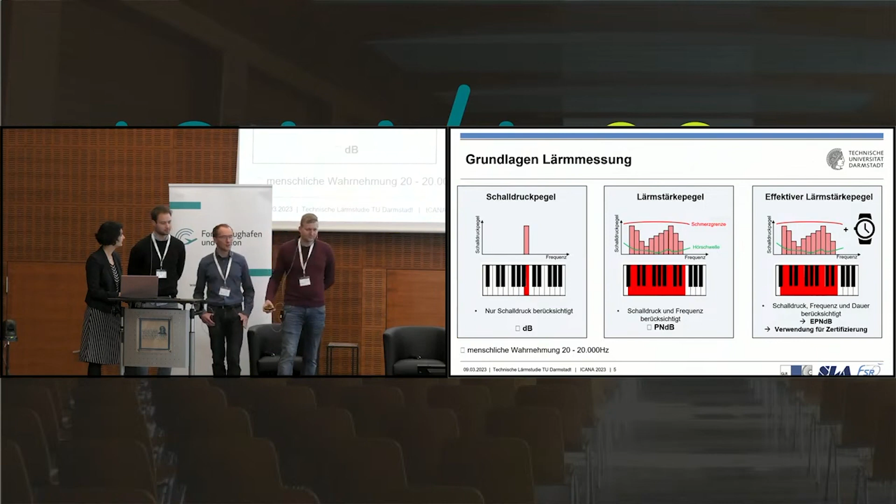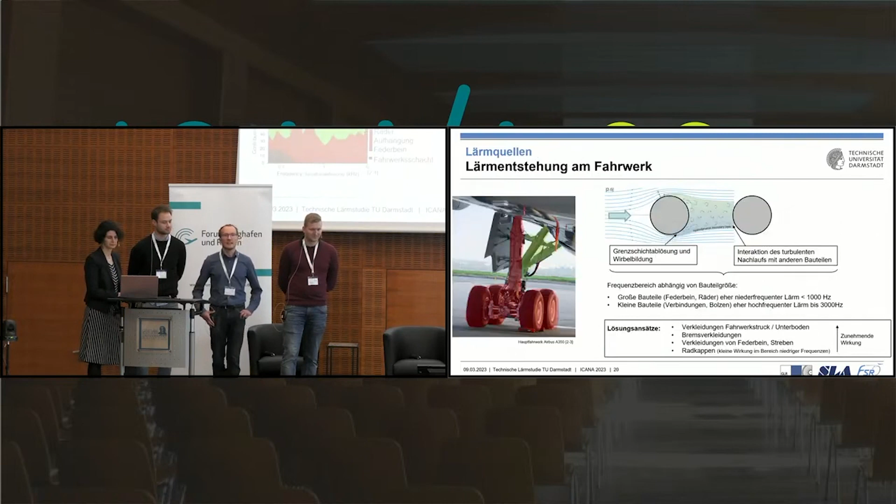Maybe the overflight value. In principle, with airplane certification there are three measurement points, that's what you refer to, I assume: departure, overflight, and what was the third... the lateral noise. The diagram that I showed referred to the lateral level. That's my second slide, more or less.

Or we can also answer that question tomorrow. Tomorrow we get a presentation from EASA about noise certification, and we'll see a picture of all the different points where measurement is taken and according to which all planes are certified. Can we postpone it for tomorrow? Then we'll have the expert from EASA there. So we'll park this question. But I have another question for you.

The noise level reduction, is it referred to the sound arriving on the ground? Not appropriate for EPNdB, you said the total signal. You mentioned the reduction potential for the different components, and you said for the total it's a bit less. Can you maybe explain this correlation?

I didn't get it properly. You can read that question here. What would arrive at the ground in terms of noise of the total plane? And is it helpful to sort it out according to components?

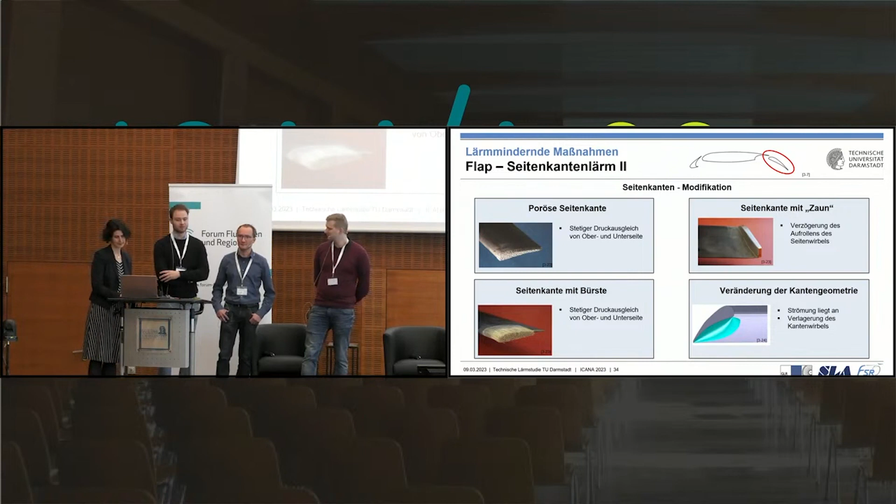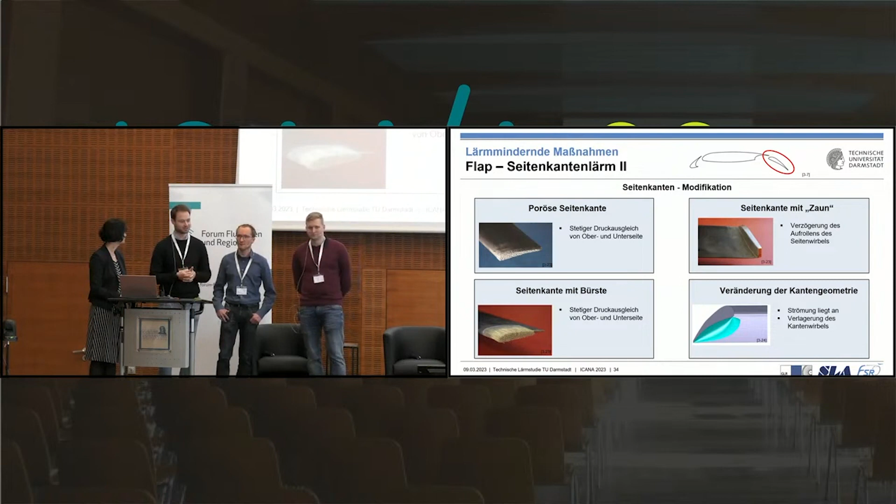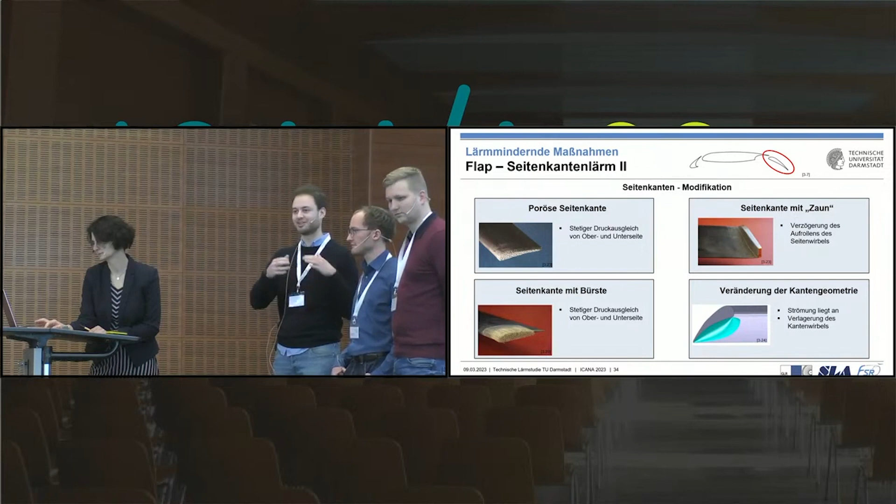Maybe I can tell you right now that the noise certification test can be shown. You fly over certain points and then have a look at the effect. If you test individual components, of course it's more difficult. Then you would do noise measurements in the wind tunnel and have to extrapolate them to the potential effect if that measure was part of this overflight test, plane flying over a microphone. So that's really difficult, but it's also done in order to come to the right assessment.

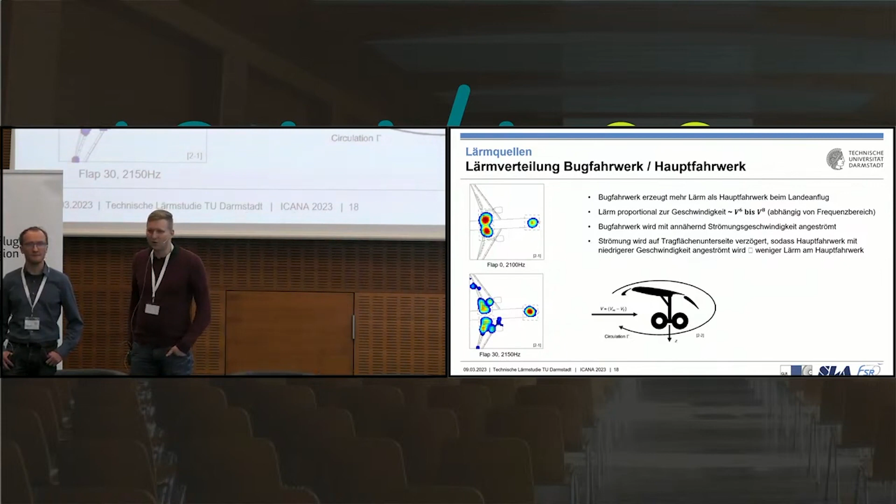Maybe you can show slide 18. That's where the mouse was. Yeah, here. Pictures on the left-hand side are flight-over tests. A microphone array is built up here, a whole field of microphones, and here you can measure the points where the noise is generated in the plane. So with the overfly test, you can really see precisely whether it was the front or the rear of the plane or other components that generated the noise, and you can come to very exact results.

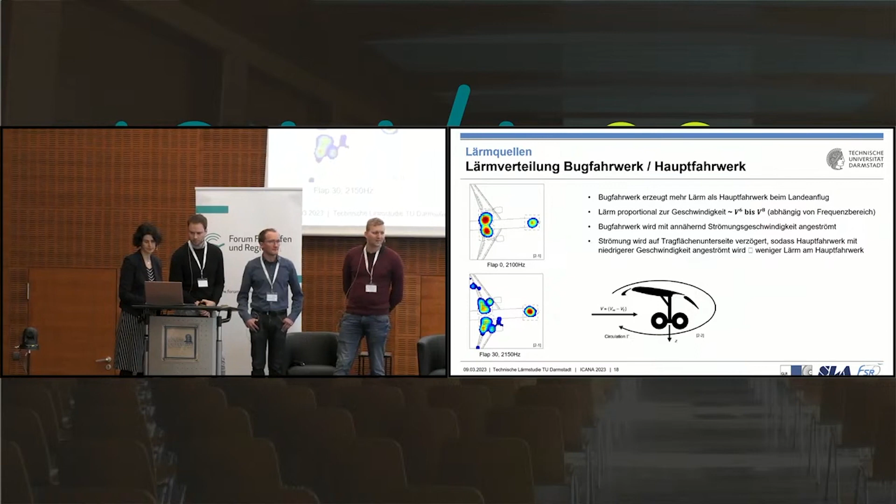There are differences. You need to carefully read the papers, and with every paper it says in the test rig, we have a microphone array, and we've had a flight altitude of XYZ, and this is not always according to the measurement points in the certification, and therefore you have to consider the results in that light, because it always looks into the optimal situation and not as they are seen. So you really have to compare the results. That also means whether the plane is really that noisy as it's measured, or would the population perceive it louder. That's a point we are going to discuss tomorrow.

How actively would manufacturers participate? You contacted manufacturers, talked to them. I may say that we talked to an engine manufacturer.

That's a big subject, and there is a presentation from Rolls-Royce later in this conference. I assume for manufacturers it's also a very important subject. Yes, we have aircraft manufacturers and engine manufacturers. Dr. Richter will also talk about that subject from the point of view of Rolls-Royce, so there will be much more input today on this.

Now, only fan engines were looked at. What about turboprops or the open rotor concept? In principle, our focus in the study was turbofan engines, that's the main part of our presentation. With turboprops or open rotor, as mentioned in that question, you have a big noise problem. I focused on acoustic linings, where the noise generated can be attenuated. With a turboprop, you don't have a casing around the rotor, so you can't change the situation with acoustic lining, and the same applies to an open rotor. In terms of noise technology, that seems much more difficult to attenuate.

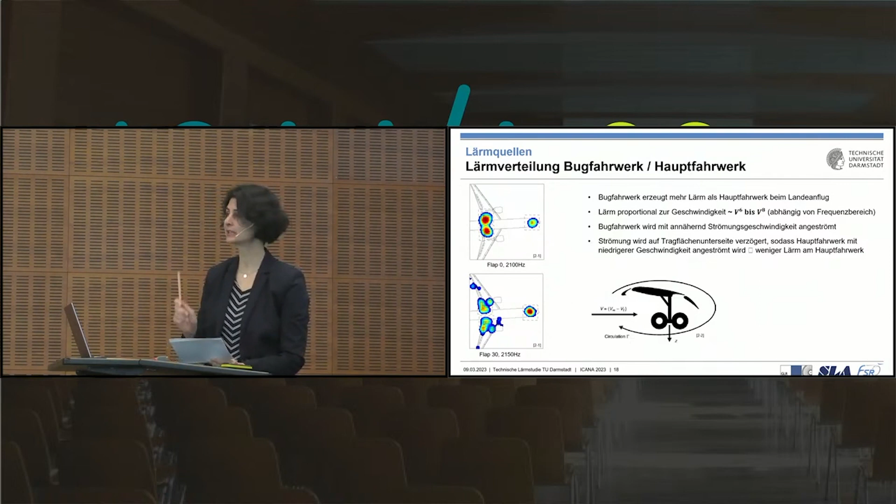Professor Enkert will talk about that tomorrow, so you have less space but you have to develop a better solution, how does that work? And what I learned from your presentation, originally I thought there's a whole wealth of retrofitting measures, you can clad something here, line something here, and it becomes more silent. That seems not to be easy, but we're going to listen to that precisely. We look into the retrofitting measures that happened in the past, what results were achieved, and what is being done with modern types of aircraft. You said that in modern aircraft you do it that way anyway, so some retrofitting measures are not worth it. What will we see in the next generations of aircraft where you could solve that problem? We also talked about the eco-demonstrator of Boeing, Mr. Stoker will be asked about that later, what happened with this and the cladding of the landing gear, whether it's worth it or not. You also mentioned the shaft holes, which produce a big nuisance, and maybe new types of aircraft don't have that any longer. So these were very specific subjects. Rest assured, even if we haven't answered all the questions after the first presentation, we have many more presentations to come on very special and individual subjects, about engines, landing gear, claddings, etc., so we go more into detail.